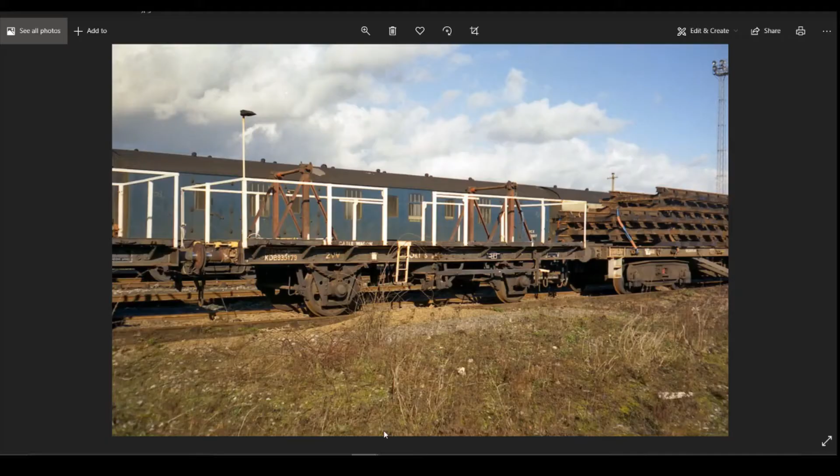First of all, we've got the wagon label here. I'm just going to draw a simple little rectangle and extrude that into the bodywork. If we look at its position, it's just before the last of the pillars we've drawn. So we can draw a sketch onto this surface, and it's just a little rectangle, probably 1mm by the height which it is.

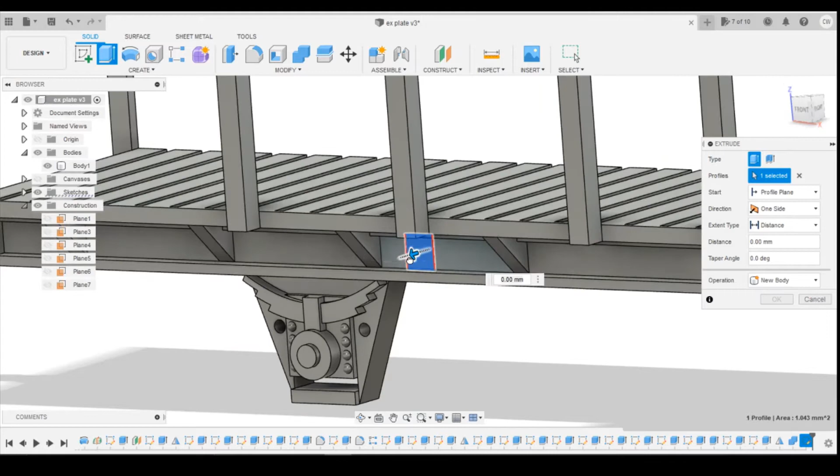Just so that it's got some relief, I'm going to come slightly beyond, slightly below the edge of the sole bar here. This is going to give us that. I might actually go back to 0.3, just gives it a little bit more. Okay, it's only representative, and you're not really going to notice it when it's down there.

The next thing I'm looking at, and I've noticed that we can copy over - if we look at the handbrake here and the arm you use for locking it down, on these two wagons, which are views from either side, you can see the hanger for the handbrake is in this position, and on this one it's in that position. But the handbrake and this arm are in the same position relative on both sides, so we can draw the handbrake arm and this locking arm that comes down, and that will copy across between the two wagons.

I've swapped to this view so we can see the angle within the arm. It starts off with the locking pins on the outside of the sole bar coming down, and then the handbrake angle sweeps in and looks like it's inside the sole bar.

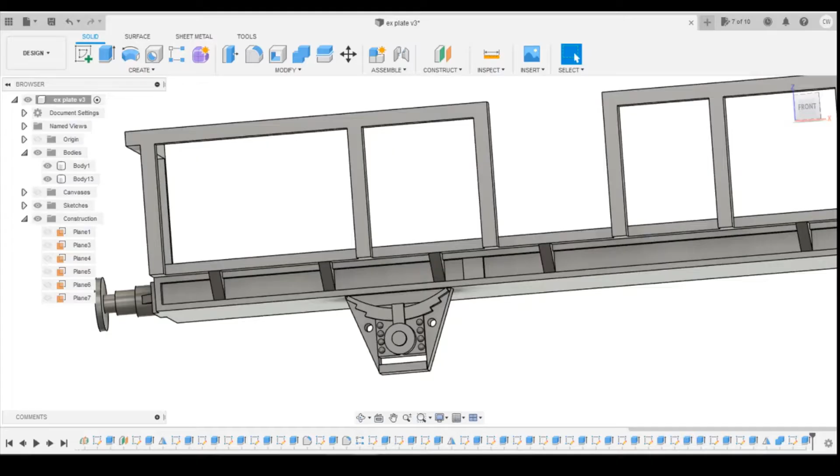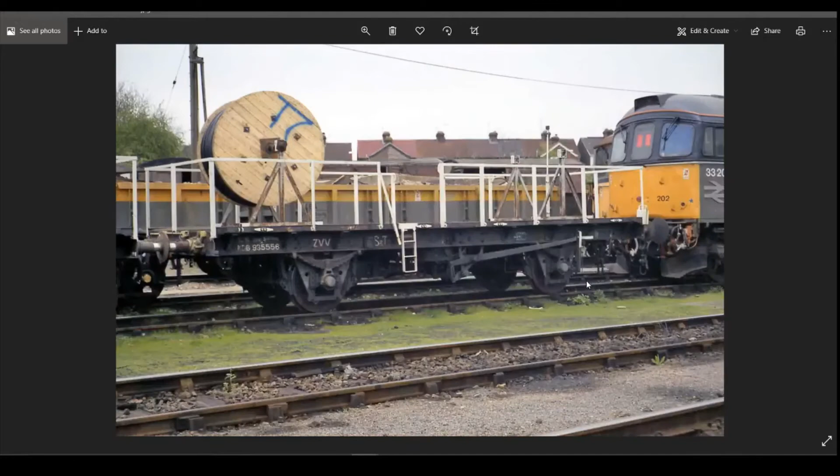So if we start drawing on this - I don't think it's on the canvas at all. Okay, so we're going to draw the locking arm that comes down to start with. If we look at its position here, let's try and find a nice side-on view. Its position comes down relative to this post, which is this one here.

So we're going to create a sketch on this bottom surface of the sole bar. I'm just going to be using a 2-point rectangle. I'm going to come down this position here.

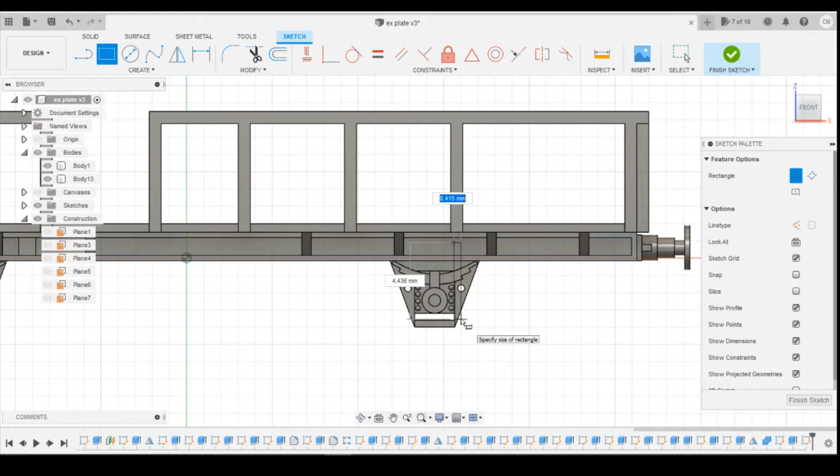So what we're going to look for now is how high it is. It comes up about halfway on the sole bar and comes down level with the bottom of the axle box. So height wise there, I'm relatively happy with that - we'll just go 0.5.

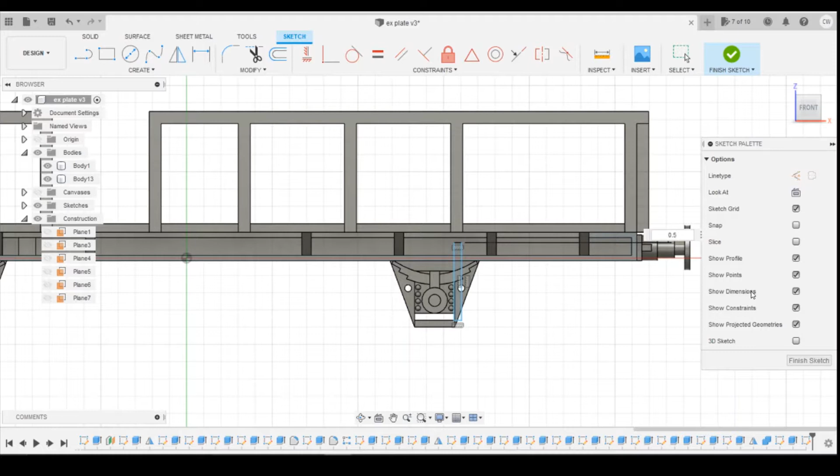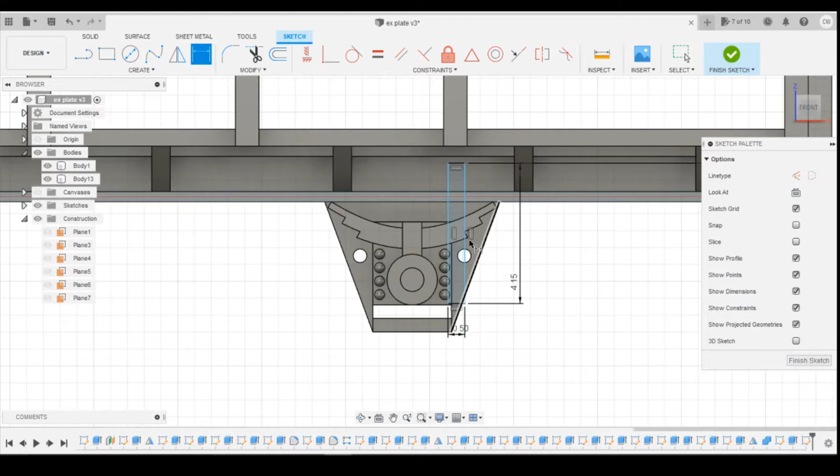And then this bottom edge, I'm going to drag this up to roughly the bottom of the axle box here. Define its width - I'm going to go for 0.5mm, and define the length 4.15mm, and it wants to be defined from there to there, so 10.2.

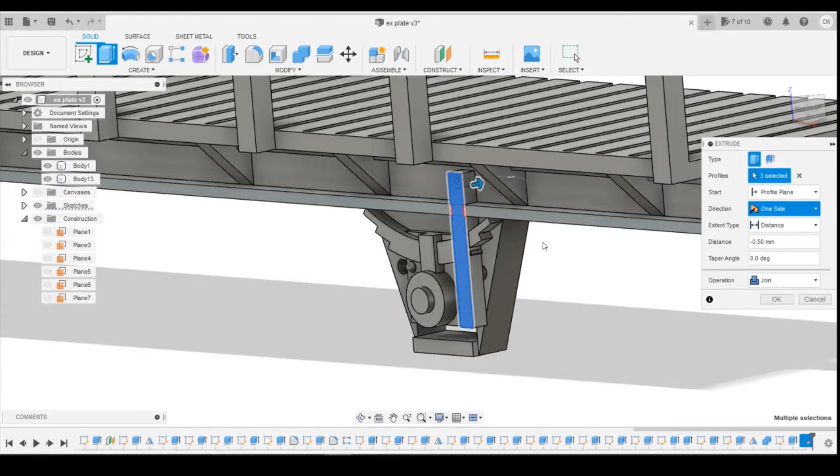Okay, so I'm then going to extrude this back into the sole bar there and tell it to join, because I need that strength within there. I'm also going to do one-sided. I'm going to drag out slightly, come forwards by minus 0.3mm - actually, I might go 0.5 actually. I know that's going to make it look quite thick.

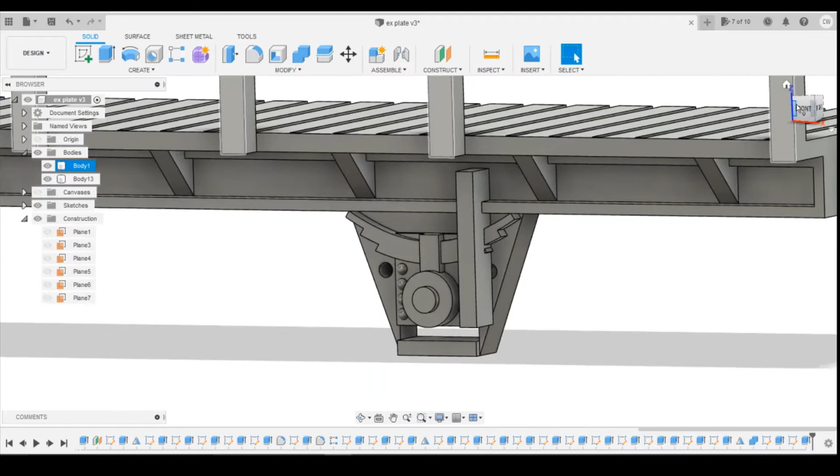But the handbrake's going to come down. It's got to join within there on the outside, and we also want to go back to the end of the W iron to give it the strength. Realistically, it would just hang on this bottom half of the sole bar, but that's not going to give it any strength, and I guarantee it will just snap off because it's so small. So there's no point doing that - you might as well come all the way back like that.

Okay, so now we're going to draw the handbrake on. It's got to be in this position because this is handbrake off - if the handle was down at any point, it should be handbrake on. So it's going to start off level with the top of the bottom part of the sole bar and then run downwards at an angle.

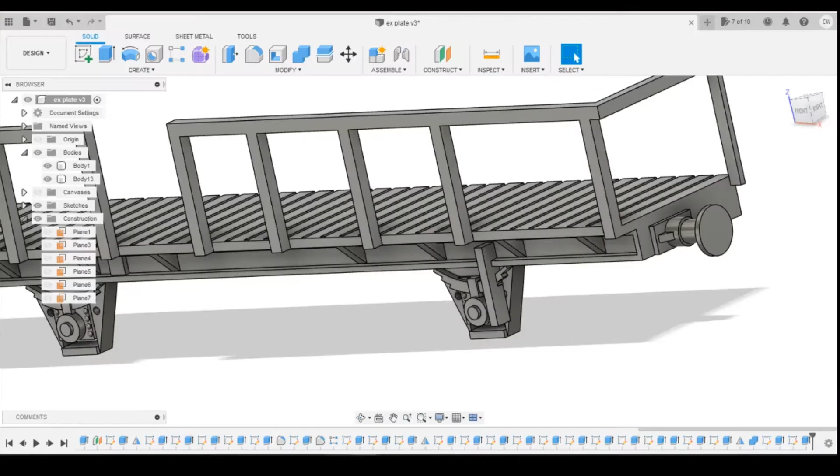To create that, what we're going to do is a plane at an angle to start with, from this edge here on the top - the one that goes back into the wagon. The reason I'm using that edge is you've got to have an edge to be able to select the angle.

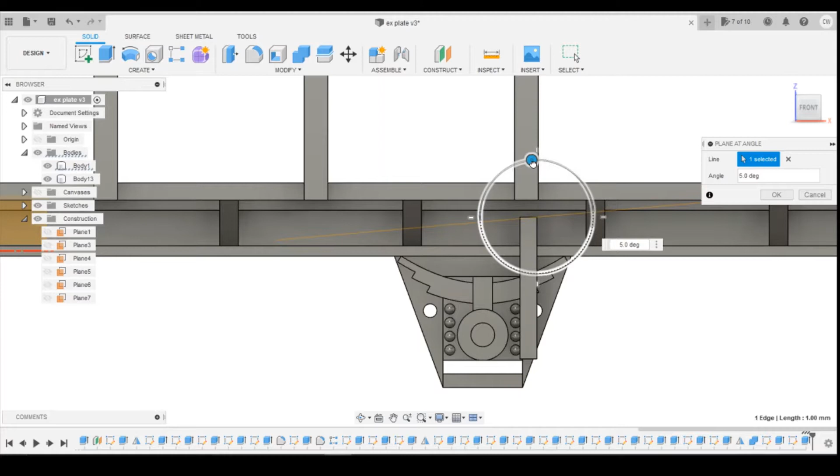I'm going to go for about 5 degrees, I think, and then create an offset from that coming down. What I'm looking for is where this is going to be at roughly the midpoint. So that's probably too far of an angle - I'm just going to change this angle slightly. I'm going to go for, let's try 6 degrees.

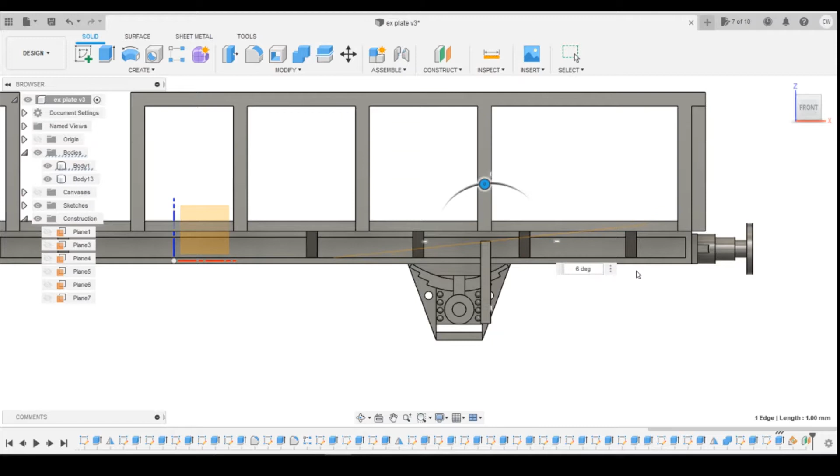So following that down, there's the midpoint of your wagon. That's going to be about this sort of position, which is level with the top of the axle boxes. So we're looking at that - yeah, level with the top of the axle. That's roughly where I'm going to go for.

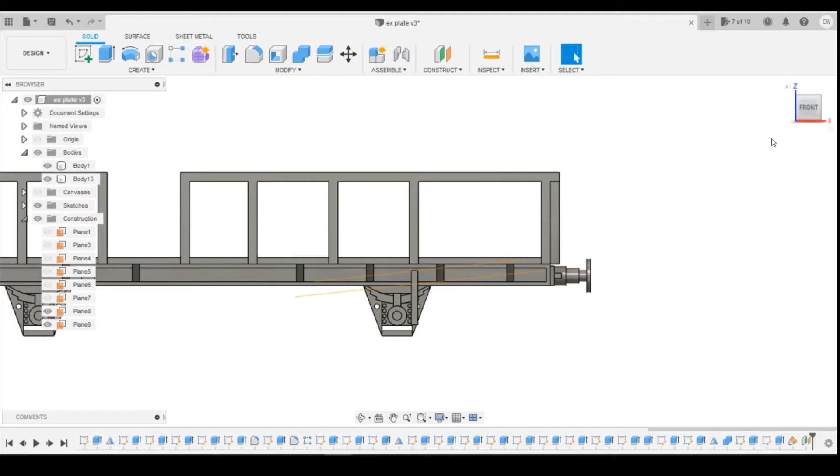Next thing I'm going to do is draw on this plane here. Let's create this sketch on plane 9. Turn plane 8 off, I'll slice so we can see through. Use the top view, we'll rotate that round.

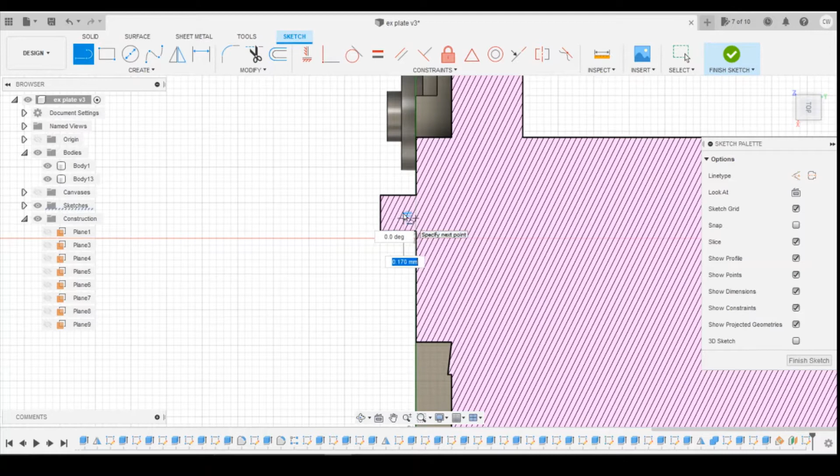Let's draw a line across here - it's 0.5 millimeters. So the length of that is going to come down to just after the axle here.

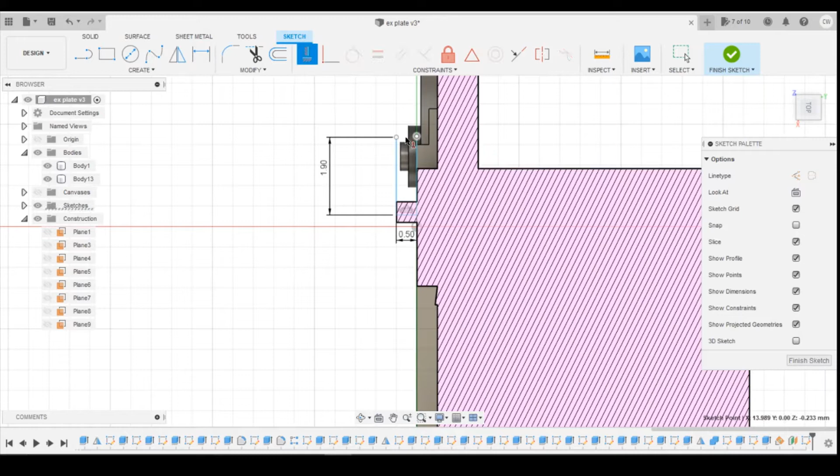So if we bring that line back there, it'll be the same, draw that line, same position there. Find the length - 1.9. You can use that horizontal vertical constraint to snap them two to the same.

From that point onwards, it goes diagonally back inside, underneath the sole bar here. So the midpoint of the wagon's about - so we're going to snap to there.

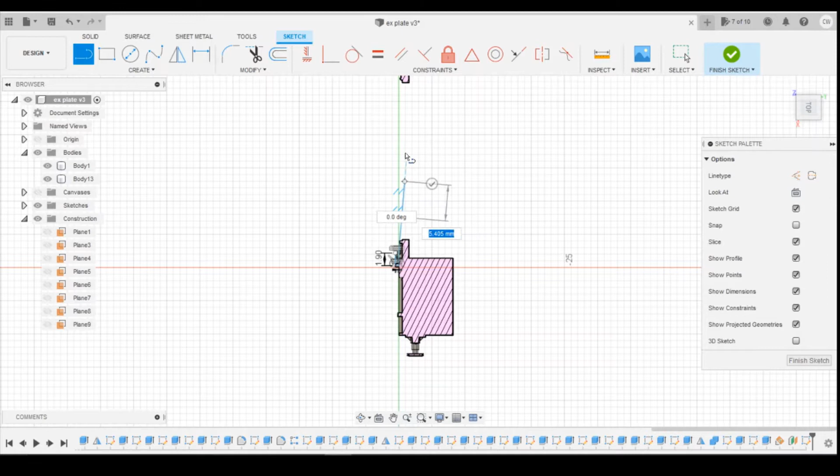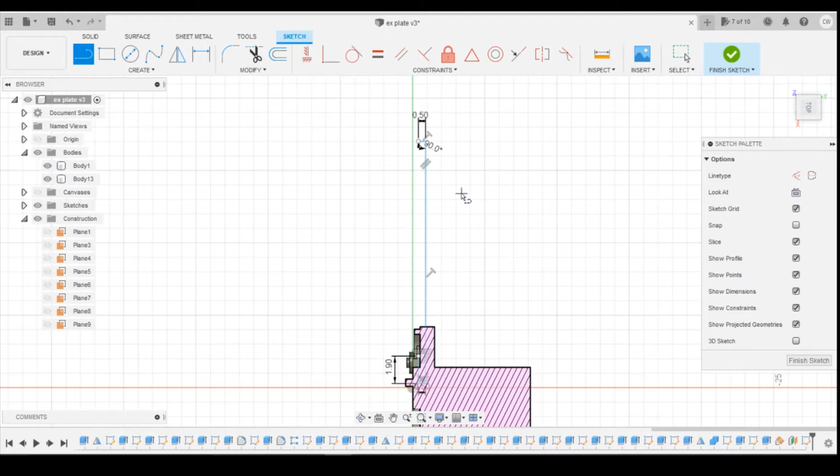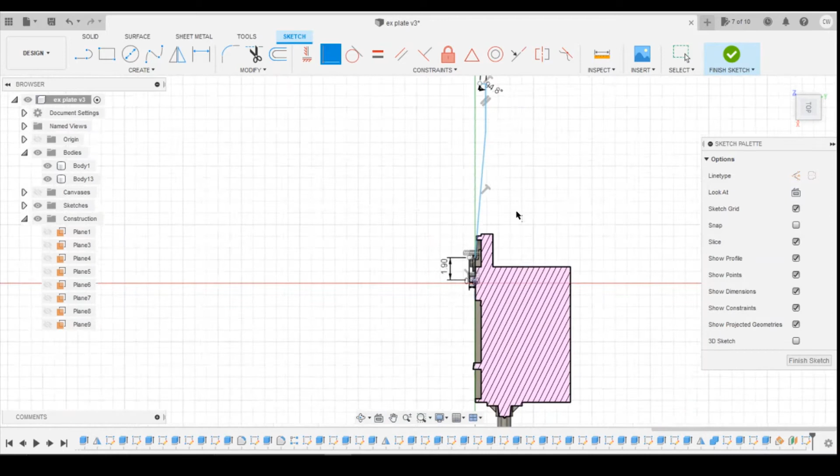And then we're going to do a short line straight there - 0.5 wide, that should be 90 degrees. I think I want - what's happened here? That's not right. Okay, you should be coincident, that line to that point, so you can't move diagonally. Okay, you should be 90 degrees.

Right, what's going on with you? Don't like you. Let's delete that line - let's start again.

Okay, I'm going to find the length of this angled bit - I didn't want it diagonal like that, it needs to match. Like that - I want that 11 millimeters. I think I want this end one 2 millimeters.

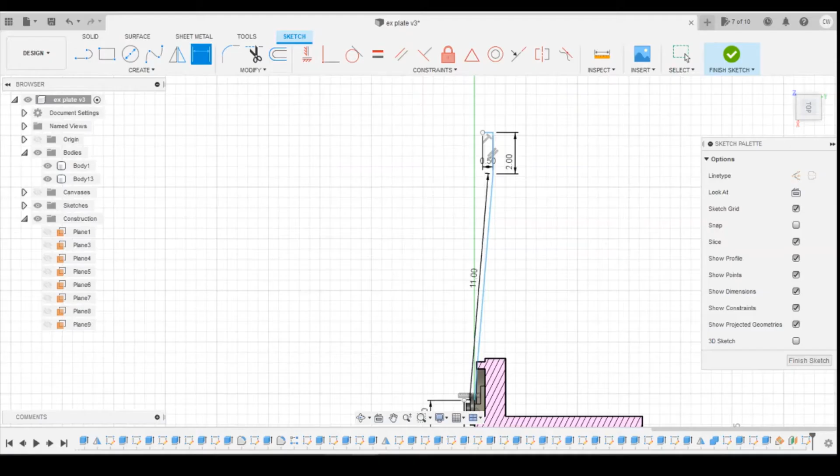So what we've got there - it's parallel to the sole bar, angles in, and then this last bit is parallel to the sole bar as well. Okay, so if we match this back up, like that.

So this is 0.5 thick all the way around. What does it need to define? I think it's the angle. Let's get rid of that angle there - I didn't like that.

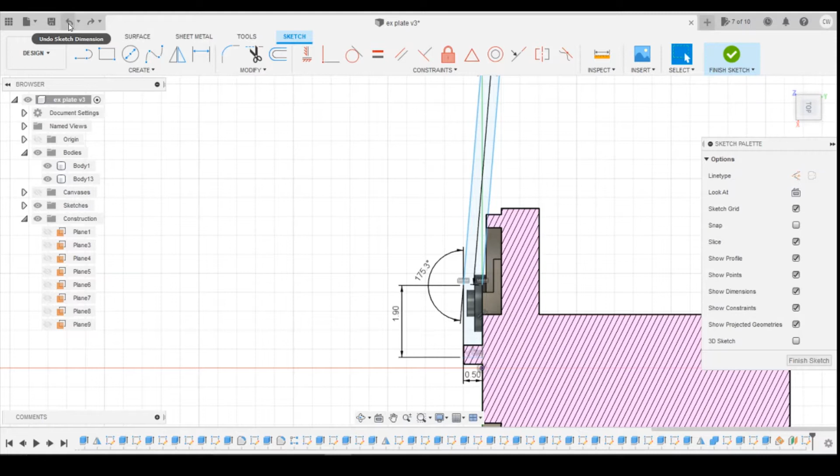That one's already constrained. What's missing? I know - defining that point to that point in that direction. There you go. So if we now select that profile...

And extrude. Now I know the handle comes out beyond here, but it's at a different angle - 0.5 thick. I want it to join.

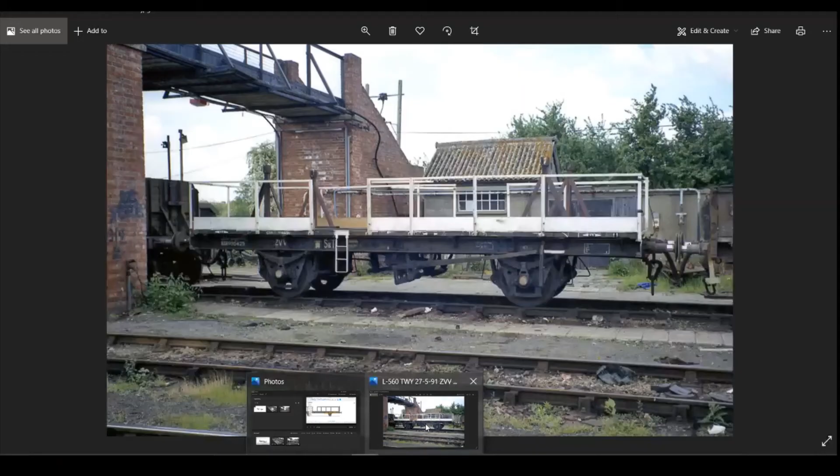Okay, so this looks like halfway here, which yeah, it looks like that. And then I've got to draw this last bit of the handle coming out the end here. So if we draw a sketch on there...

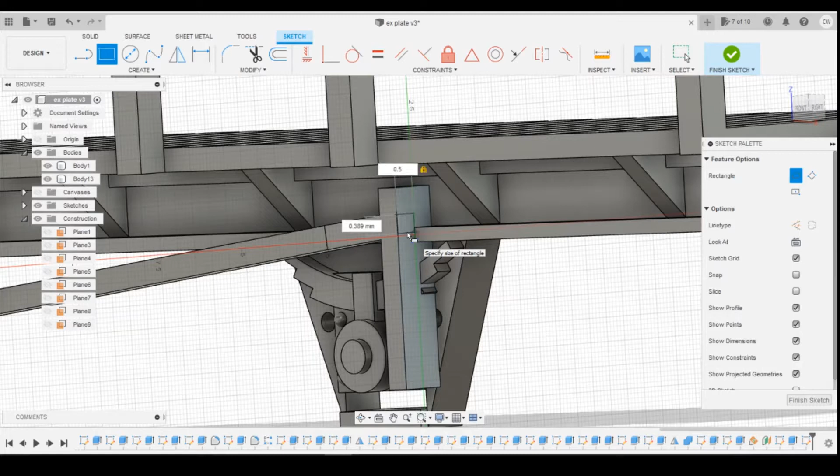And I'm going to do a rectangle that's 0.5 by 0.5, like that one. I want that corner - it won't.

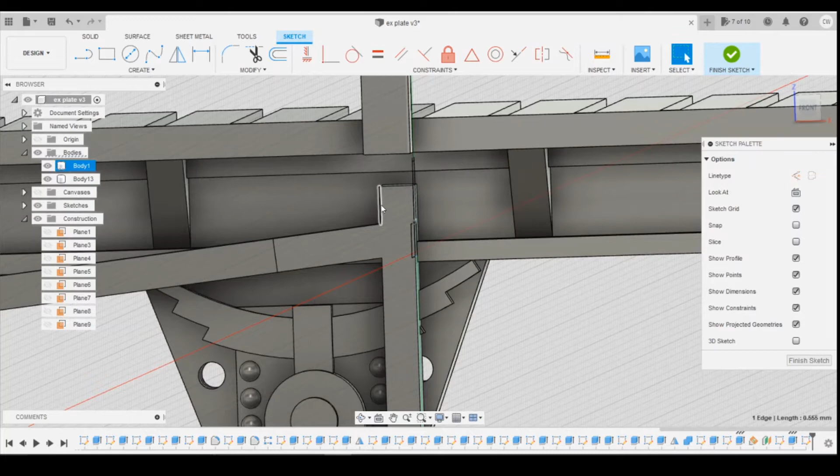So we went to measure that, so that's 0.55. So if we then define there to there, height-wise, that should be 0.55, and then when we extrude this upwards, that should then come nice and straight along the side of the wagon.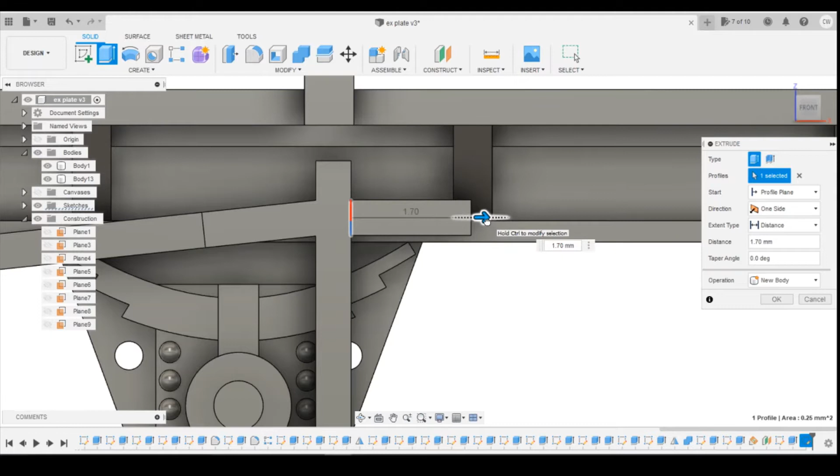That's joined. Okay, so there we've got our handbrake shape - comes down at an angle and also angled in side the sole bar there.

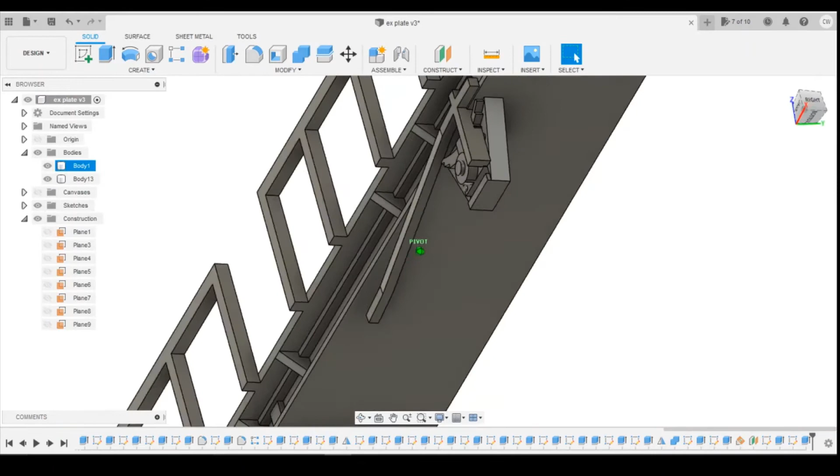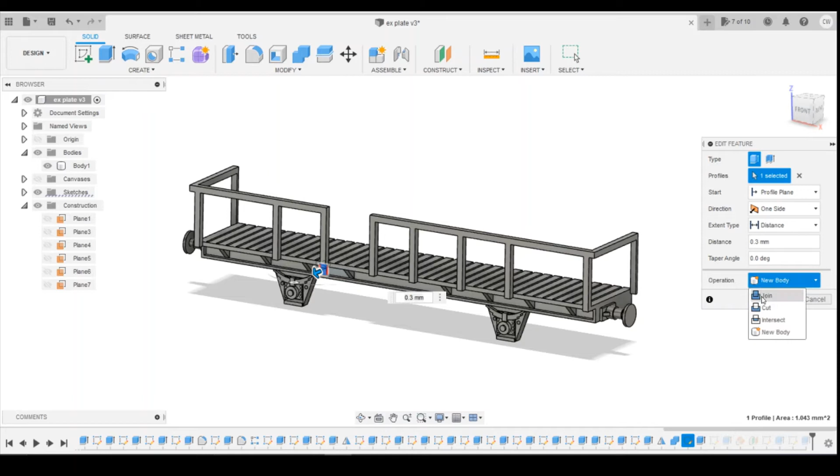Okay, we might have to come back and change that angle depending on how far inside we want it, but we'll have a look once we've copied this across. So now we've got the handbrake drawn on, we're going to copy this half of the wagon over. We'll step up, go and edit that feature, and change that to join.

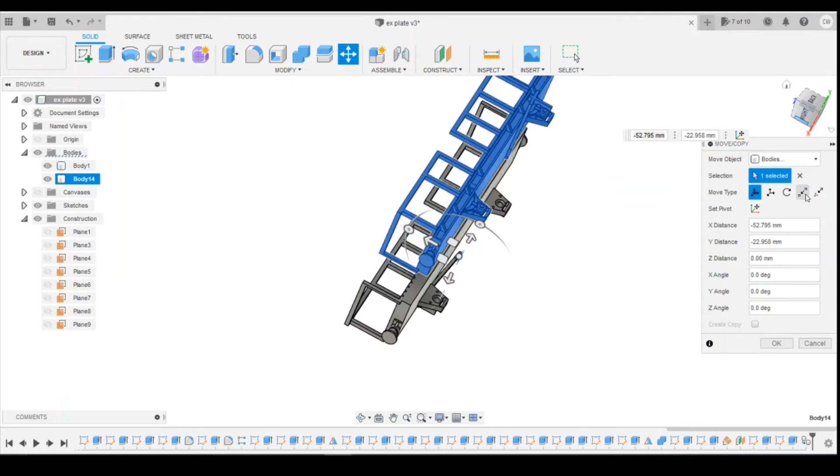Now I'm going to copy the body over, and if we do a paste, looking from top down, we can rotate this through 180 degrees, then move it across over here out of the way. Then we're going to use the point-to-point method to snap that corner into that corner so the two halves match up. When we click OK, they'll join and become one body.

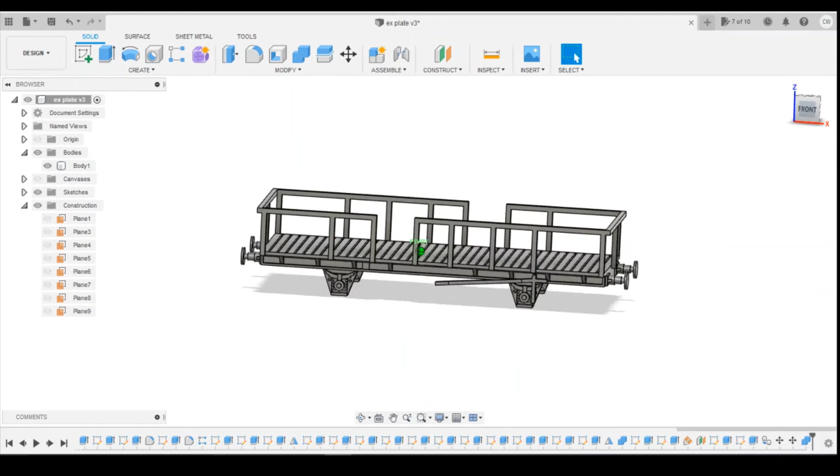Click OK, so we've now got a completed wagon. Obviously we've got some more details to add, but we've got a whole looking wagon there. Just to highlight, we've got a choice that we need to make.

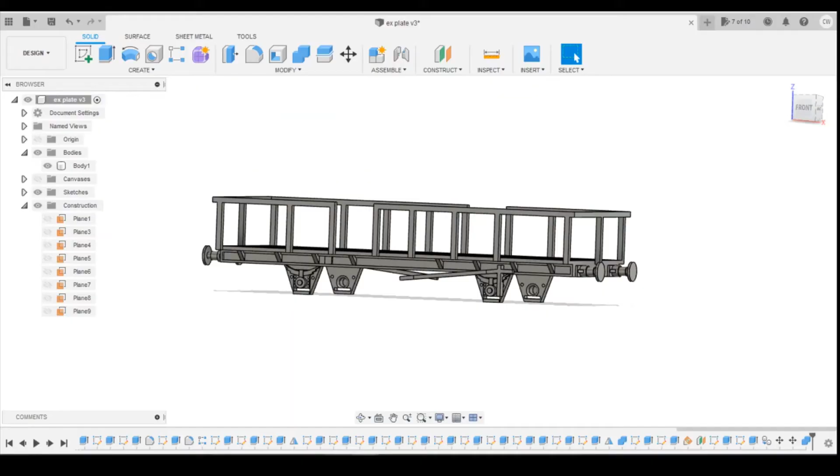We can either do the wagon with these kickboards around the bottom, or there's a version without. It's the same wagon, it's just that at some point during '91 it looks like they had these kickboards added in. So it's completely your choice what you want to do. You can just continue from where we are without it, or if you want them in there, roll the history back to before the copy feature we did, and then draw the kick plates on the back of these uprights.

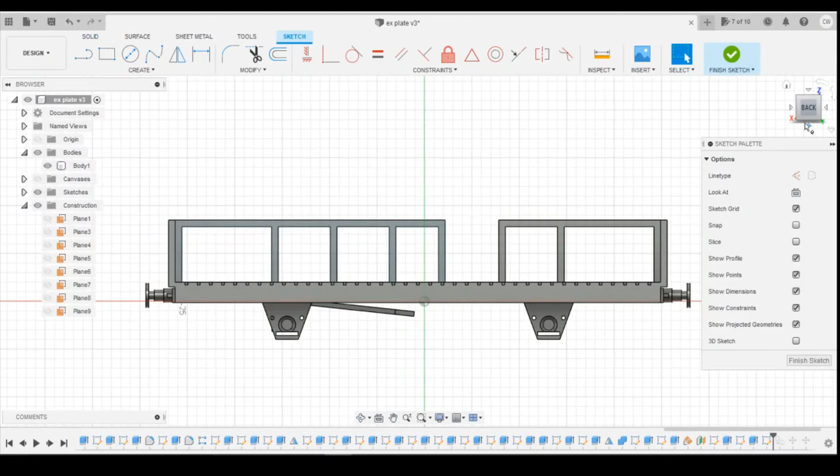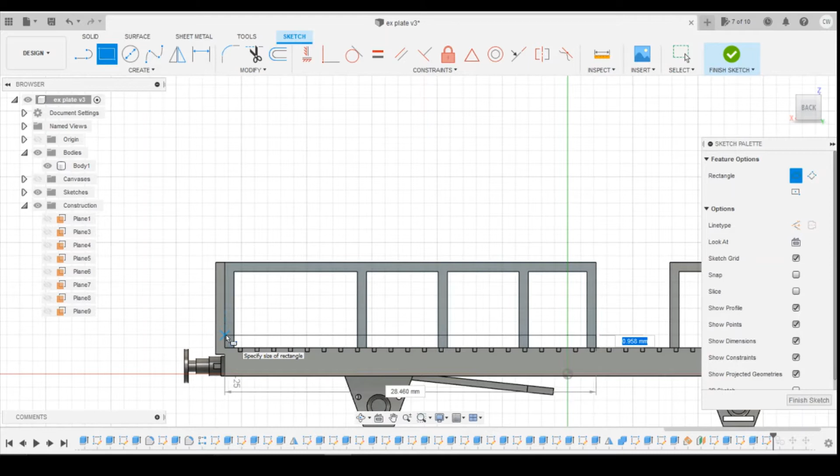If we select the back face of these uprights, I'm just going to draw a rectangle. It will snap to the bottom corner and we'll come all the way across. I think they're probably going to be about 6 inches, maybe a little more. No, probably closer to 8 to 10 inches. I reckon they're going to be about 8 inches, so I'm going to go for a height of 1.2 millimeters. Define the length so it goes all the way along there.

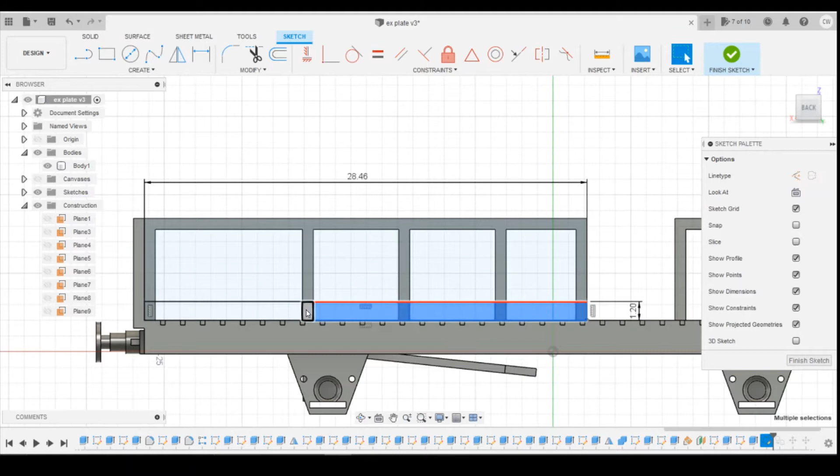And then we can select all of these inner profiles here, and we're going to extrude these, giving them a thickness of about 0.4 millimeters, so not particularly thick.

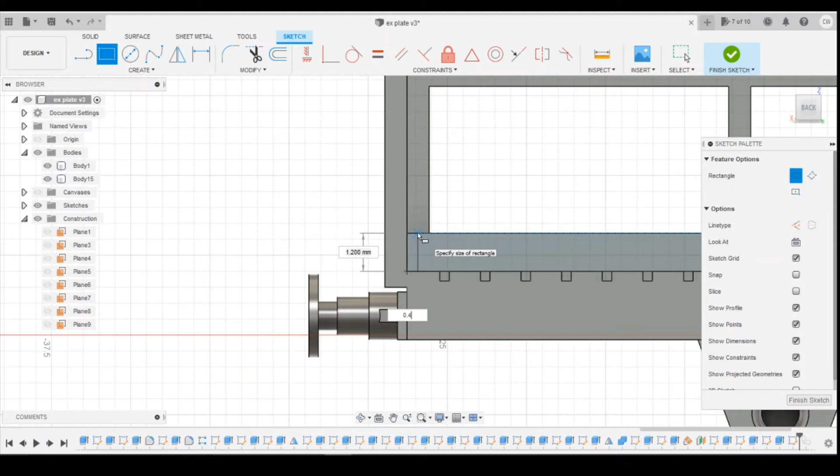Okay, and then draw again on this face. Same rectangle, going to start in the corner. This time I'm going to give it a thickness of 0.4 there, height 1.2, which is what we're after. And then if we extrude that to the front face there, go to join.

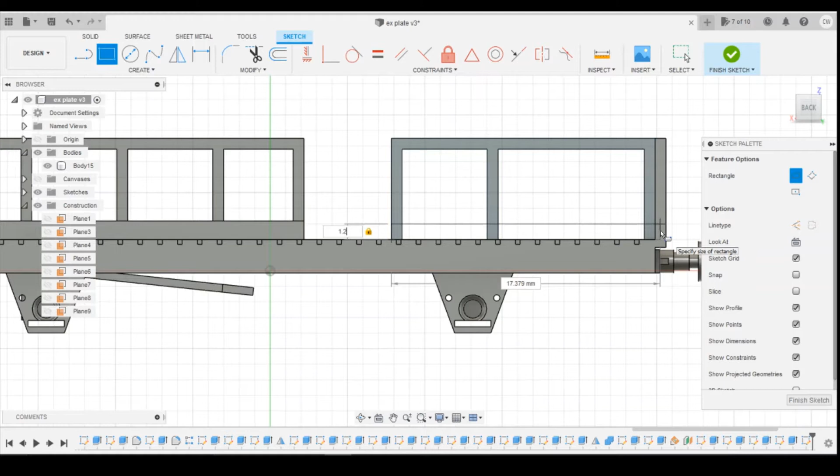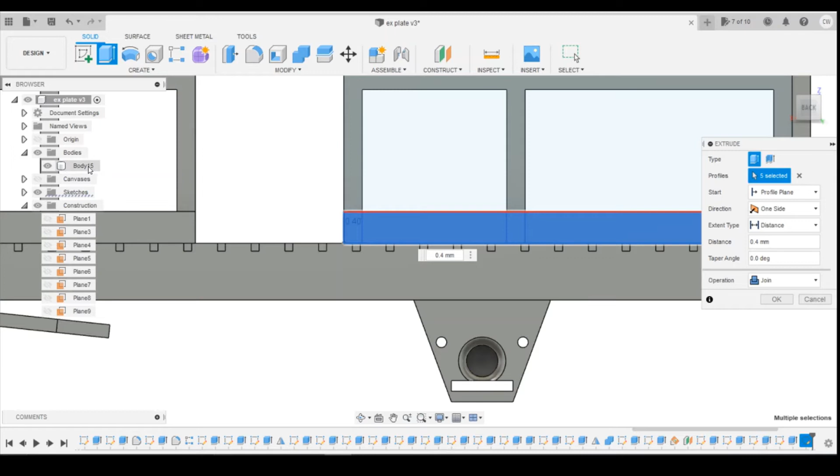And then again drawing on this surface here, the way along, height is 1.2. That should be snapped to that corner. Extrude 0.4 millimeters, making sure it's joining. I need to check what's happened there.

Let's just go back in this history. I bet it's something here. Yes, tell that to join - so that created as a new body rather than joining there.

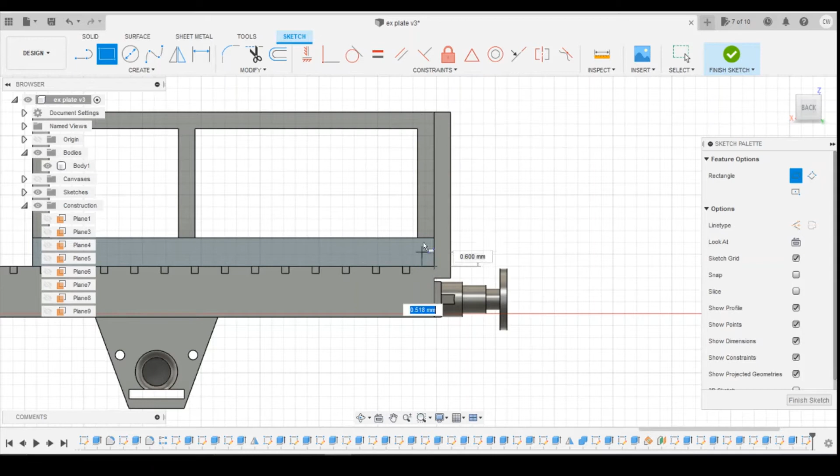Do the same on the end here with the sideboard. Start in the corner, come up. It's 0.4 thick and it's 1.2 high. Select that profile and extrude to that inner face. Click join, and click OK.

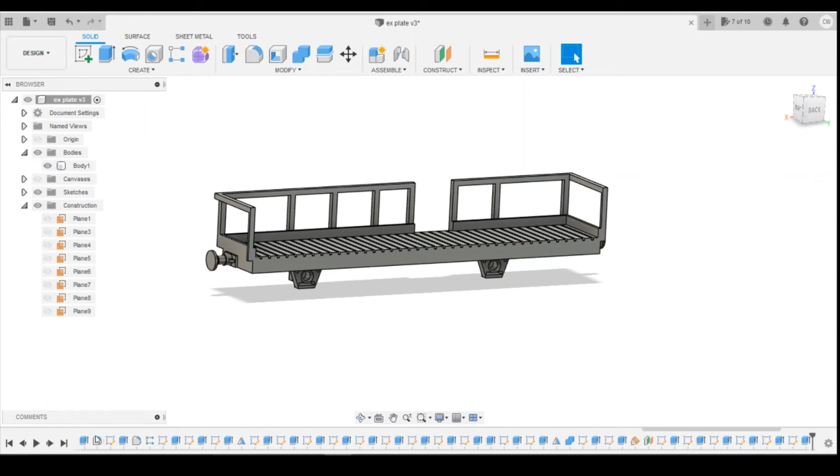So now we skip back through the history to the very end. We've now got the kickboard that goes around the outside. Quite a simple little addition - it gives you that variance between the two wagons.

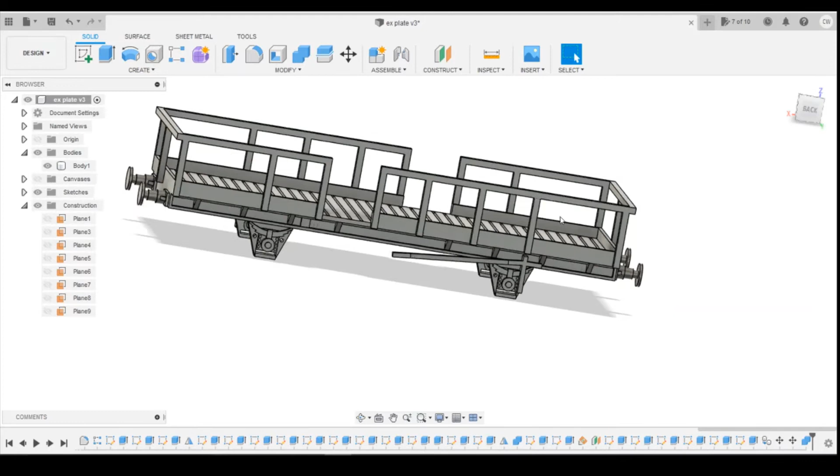If you wanted to, what you could do is go a little bit more into detail - how high is that? 0.5. You could draw in on each of these panels. It's probably a good idea to do this actually.

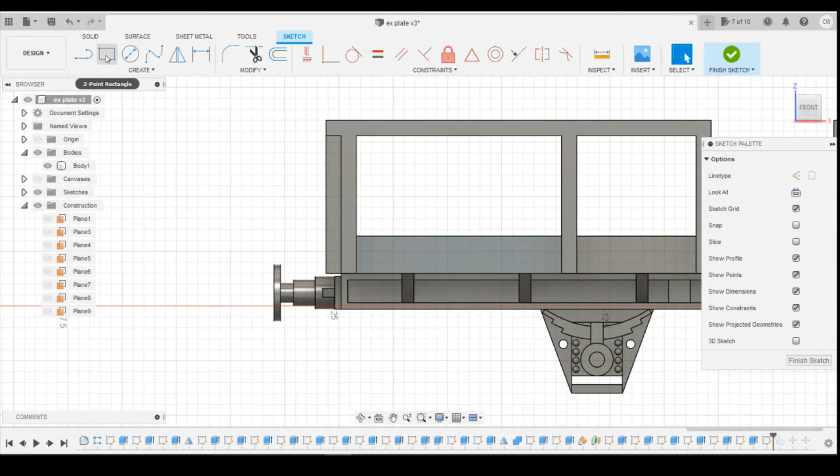Let's just draw a small rectangle on here, between the panels, at 0.2 thick, that to that edge. That's because it's a bit of a constraint there - go with that, to that edge, as 0.5.

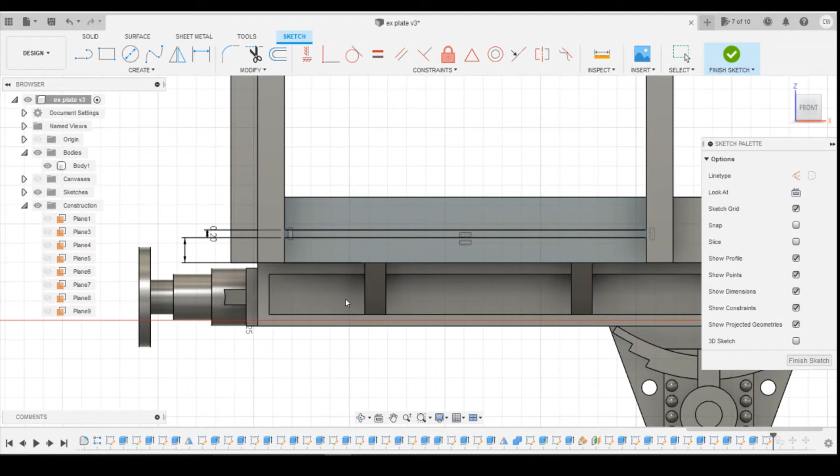And then extrude this into the wagon by -0.2, just to give it that appearance of being a separate board. Do the same on here, using the horizontal vertical constraints to constrain that to that, and then we can extrude that inner profile.

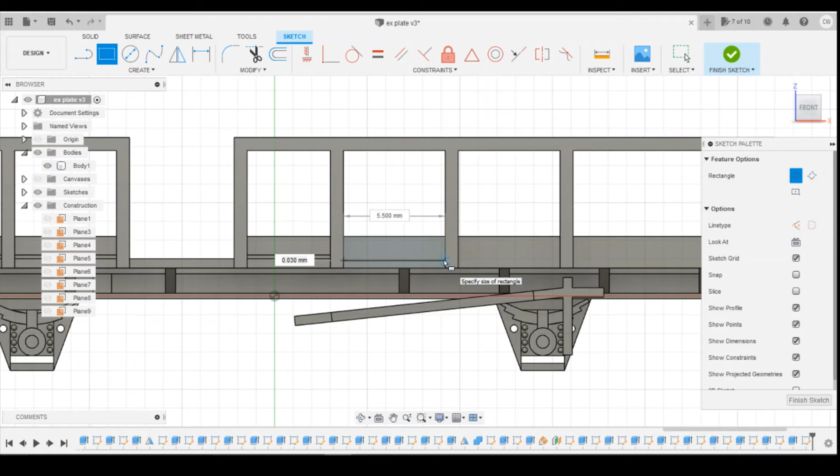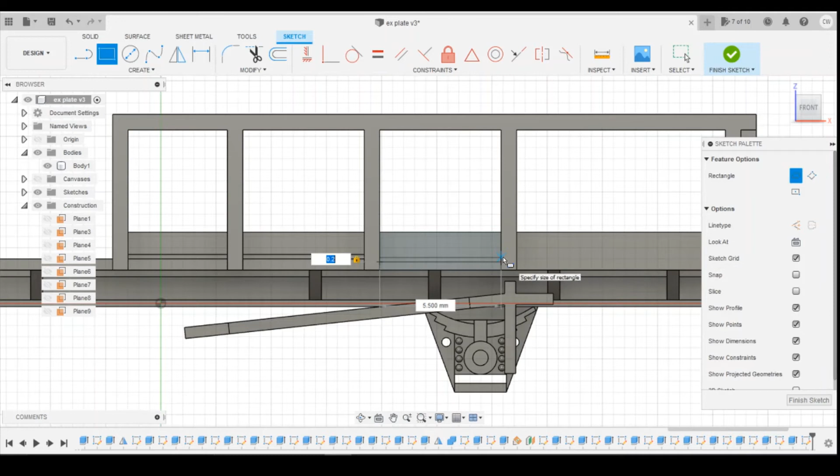A little bit laborious doing this, but it will improve the look of the wagon slightly, because you'll end up with what looks like panelled rather than just a smooth flush side.

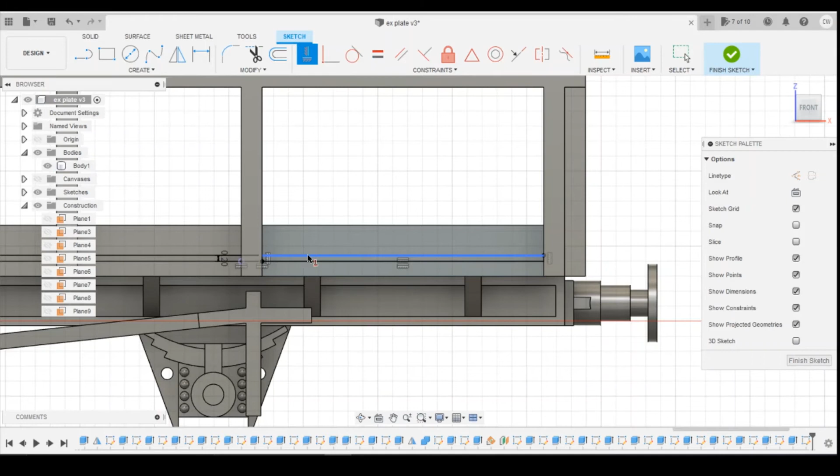Okay, so for the last one on this, that's the ones down the side, and you've got the end one to do here. So we use the same height, it'd be 0.5.

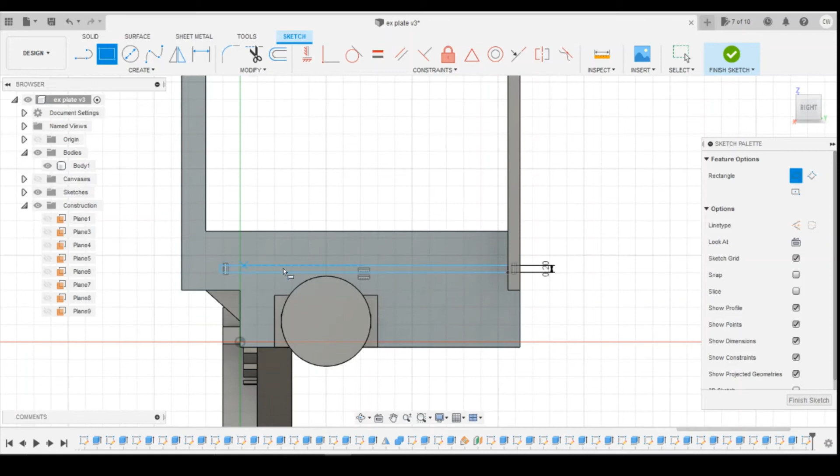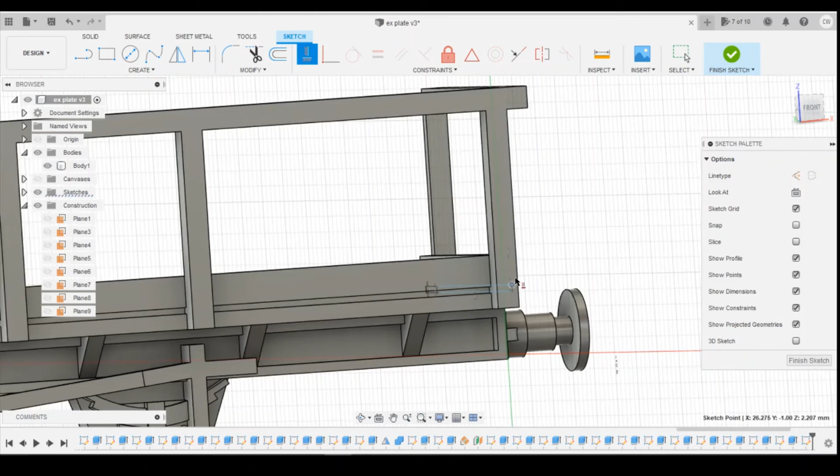Vertically constrain that with that, and then see if I can horizontally constrain around the corner. Jumping mouse, that. Won't let me.

That's not an issue though, because what we can do is just define there to there, which is 0.5 millimeters, and then extrude this minus 0.2. Okay, and then one more to do on the other end.

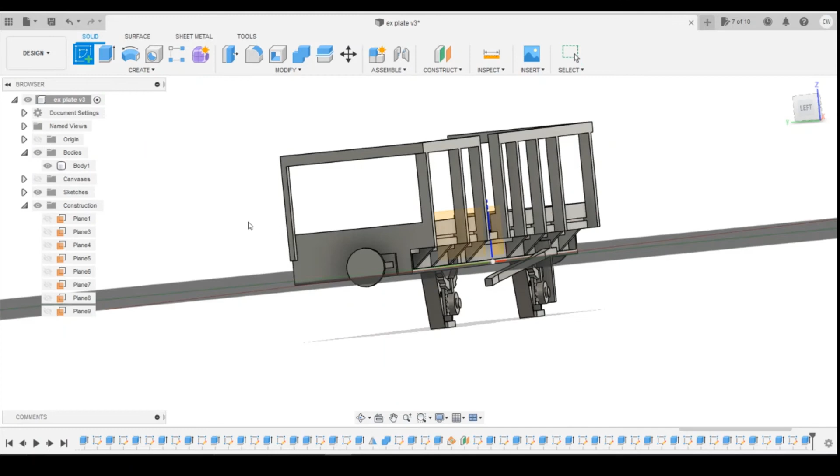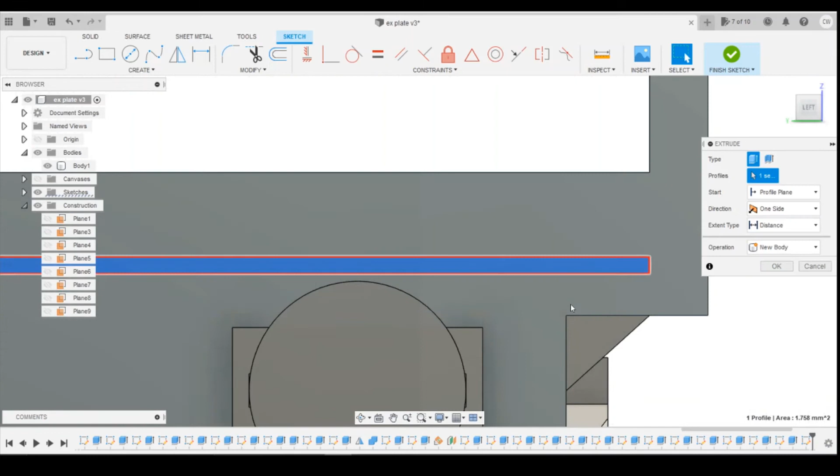Again, vertically constrain that to that corner. Define the height from there to there. And then extrude minus 0.2.

Okay, so that's going to give us our wood step effect. Maybe this needs to be a little bit taller. If you wanted to, you could. You just obviously have to select the top edge.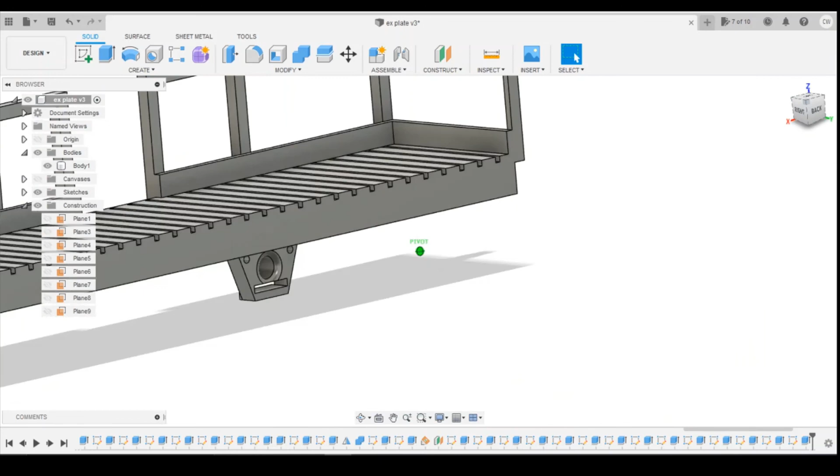The easiest way to do it here: select this top edge. It's going to make mine slightly a bit smaller. You extrude that up by 0.2. And do...

The same on this one. Okay, that gives that just that slightly taller effect.

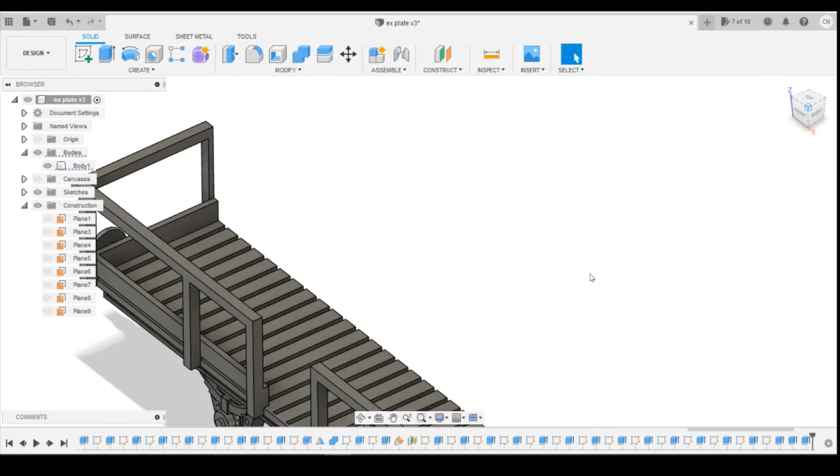Okay, jump to the end. That will then go all the way around the wagon. Nice and simple to get to this stage.

So obviously if you wanted to not have these, you would then just have to go into each of these sections and hide them basically. So you could say, for this one, suppress the feature.

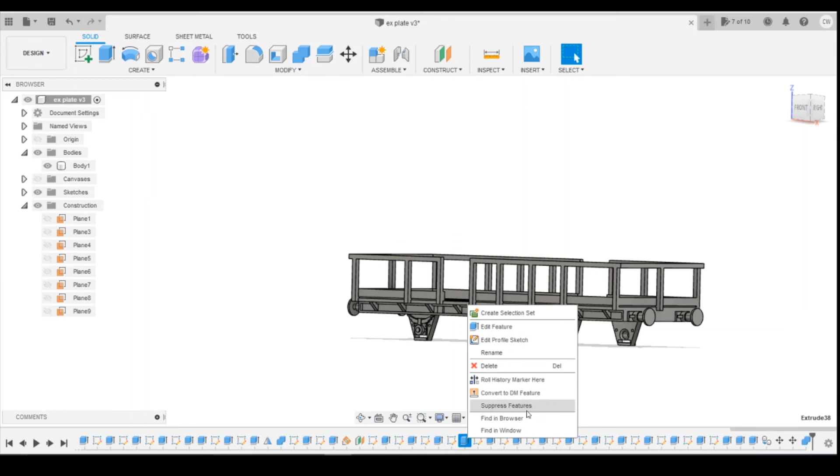And then that would cause it to disappear. So that's this one here disappeared. Yeah, you just go around and suppress or unsuppress them.

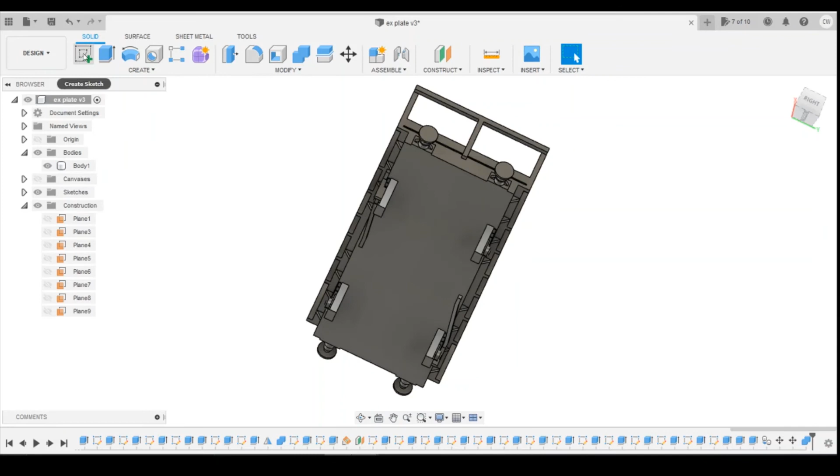Okay, so one thing I'm going to check before we go any further: do we have enough room across the wagon to get the wheel set in? So if we just do inspect, we can inspect from that edge there to the other side. We need about 13 millimeters.

So 13.2, so that's pretty much perfect. I'd be happy with that.

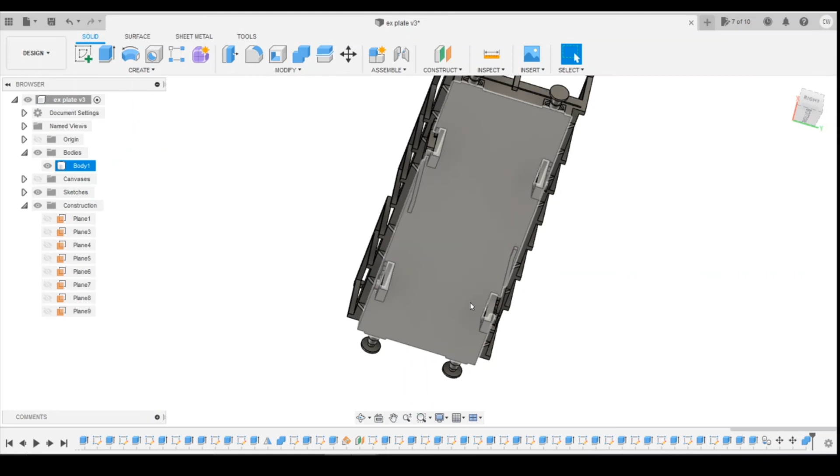Okay, so what we can now potentially think about doing, before we go much further, is adding in the recesses for the wheel sets. If we just come back and cancel that, I'm going to roll back to that history marker there.

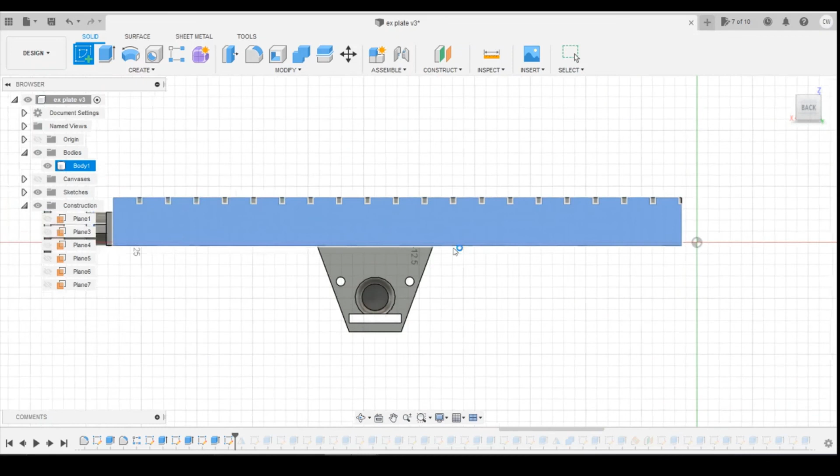We better put the recess in here for the wheel set. So I'm just going to create a sketch on this inner surface here and do a rectangle that takes a nice chunk out of the wagon there.

And extrude that, like that.

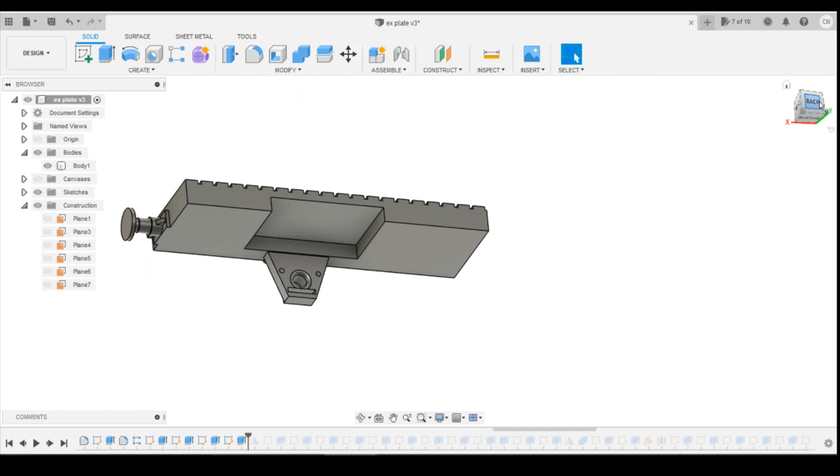Okay, one thing we could do to check it is just jump back through the history now. I'll then put that all the way in. One thing that we could do is recreate an offset plane from that.

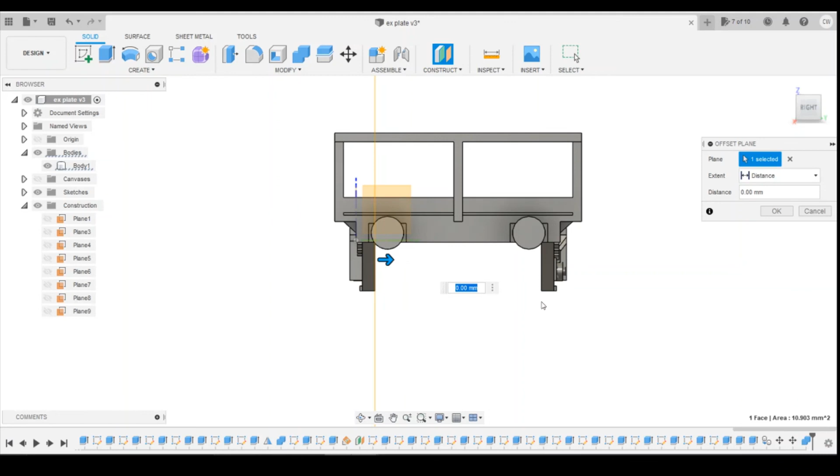Just reset, and we could create a dummy wheel in here to make sure we've got enough room. So if we just reset at 0 millimeters...

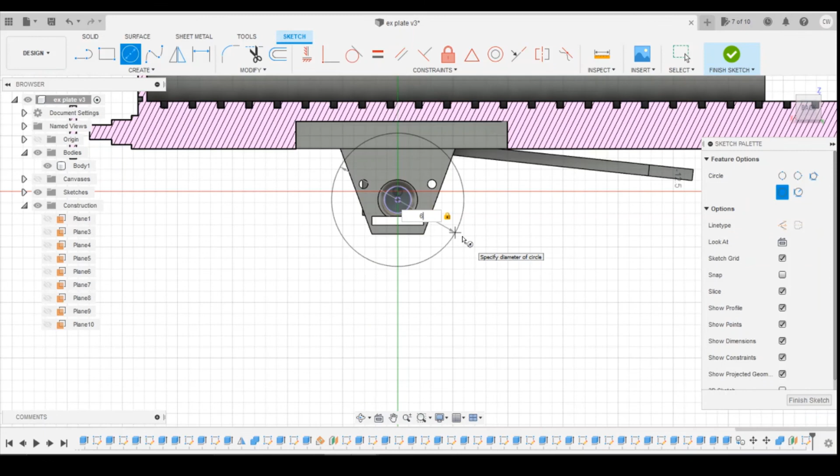Create a sketch onto that plane, slice through the wagon, project that circle, and create a circle here—the wheels are 6.1, so if we do 6.2, and then extrude those.

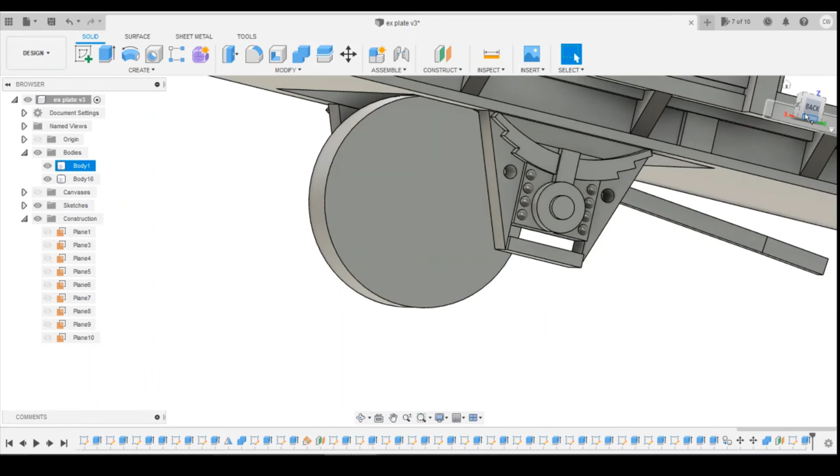Okay, so obviously it doesn't look like a wheel, but the fact that it's the same size is what I'm looking for here. So you can see at the top here, we've got plenty of room for the wheel to rotate and not actually cause an issue there.

Okay, so I'm just going to rename that, and that can sit in there, and we can just use that to check all our clearances. That's a nice little tip that would be handy to make sure you've got enough room.

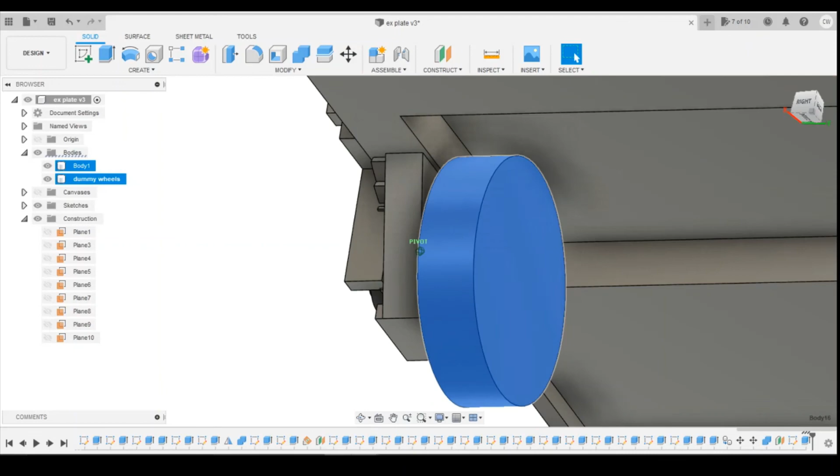I'm going to leave this episode here for the moment, and then we'll come back and pick up drawing more details in future episodes. I hope you've enjoyed watching.